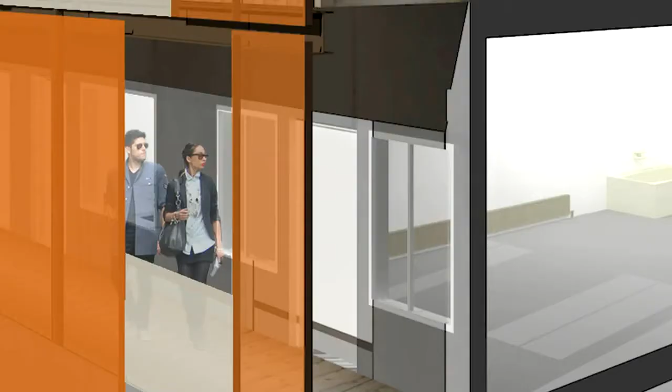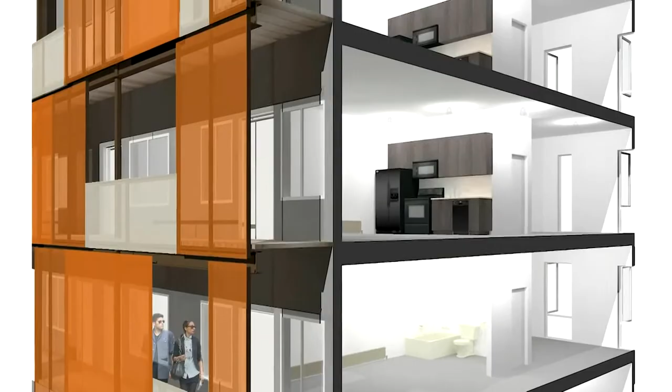I saw the opportunity when the economy slowed down that we could change directions. We could take a new course. We could really focus with the more limited resources on what people really needed, what was going to benefit the greatest amount of people. And what popped up was the Path to Net Zero program. And I thought, oh, this is perfect. This is exactly what we want to do.

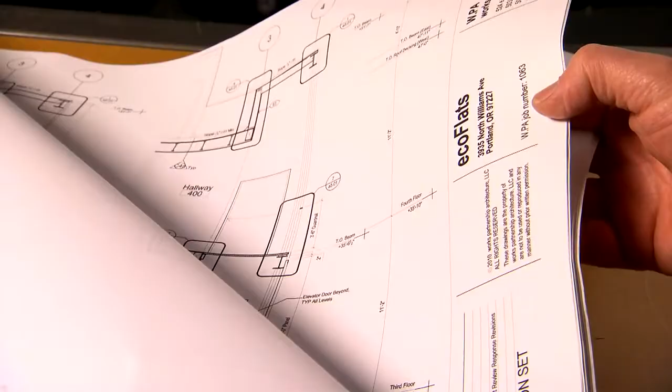This makes sense. We designed a building that had specific costs in mind for what people could afford in a neighborhood. When you approach a project like this, you need expertise on board to see how what things are going to apply and what are going to be the biggest bang for your buck. But where are you going to go to be able to integrate HVAC with solar thermal, interacting even with plumbing and all kinds of different specialists? You have to be able to go to one central place where that can be understood. And so that's the Energy Trust of Oregon.

One of the great design features of this building are the exterior walkways, which help to save a lot of energy. What we've been able to accomplish here is that there's no heating or cooling or conditioning provided to these exterior spaces whatsoever, and the lighting is only being used in the evenings. Making the decision to incorporate exterior corridors instead of interior walkways really eliminates the need to heat and cool those spaces and results in annual energy savings of around 10% per year.

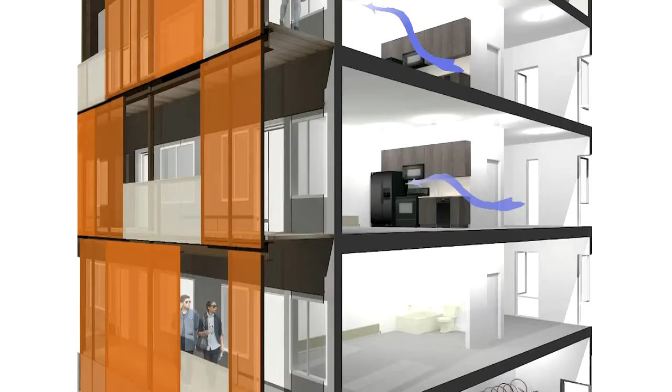The apartments are able to be pushed all the way to one side of the building, allowing for cross ventilation, natural ventilation, to cool the units in the summertime. In the day when you're gone on a hot day, you close your shutters from the inside, and in the evening you come home, you open your windows, turn on your fans and open your shutters, and you can relieve any hot air that might have built up during the day. And that, for this temperate climate, is all you need for comfortable living.

The siding itself is a ceramic coated material that has a 7/8 inch air gap behind it. So on the hot days of the summer, this being the west facing part of the building, the heat is prevented from penetrating the building by hitting that ceramic layer and ventilating out behind before it penetrates into the building.

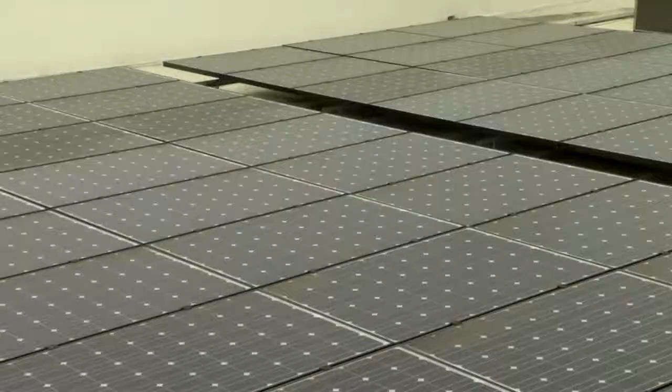Solar PV is the first thing that you want to be able to bring to a project. So what we had to do was design a building that could be affordable and meet the rents of the neighborhood, and add essentially a $125,000 solar array.

The solar PV system generates about 18,000 kilowatt hours annually, resulting in energy savings of about 20% off the utility bills. We were able to accomplish this with energy incentives and the elimination of AC units and their future maintenance costs. That's basically how we were able to add it.

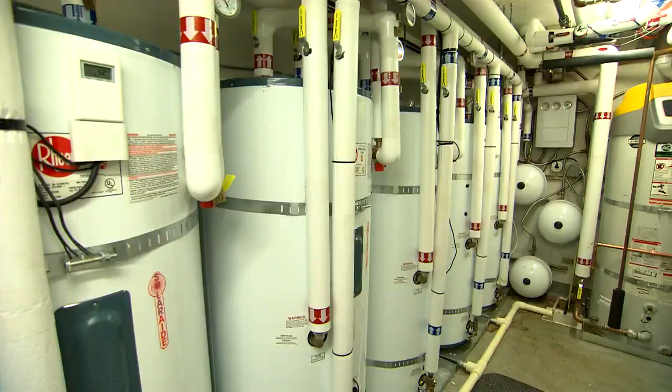These hot water tanks are banking 600 gallons of hot water from our solar thermal system. On a normal sunny day, the system can generate 2 gallons per minute at 185 degrees. On a long day, we generate a tremendous amount of energy.

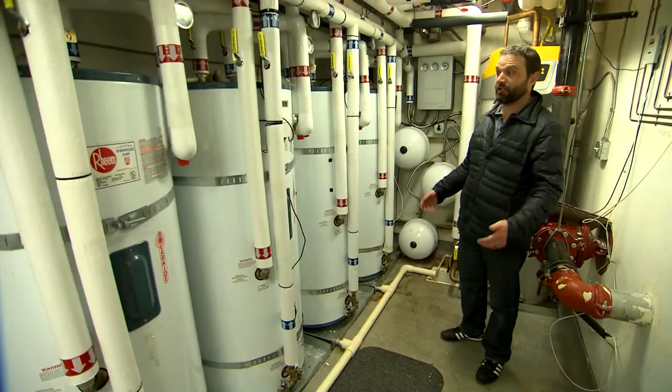Because domestic hot water is one of the biggest energy users in multifamily buildings, it made a lot of sense to put a solar thermal collector in this building. In this building, it saves about 700 therms per year, which translates to about $1,000 off the utility bills.

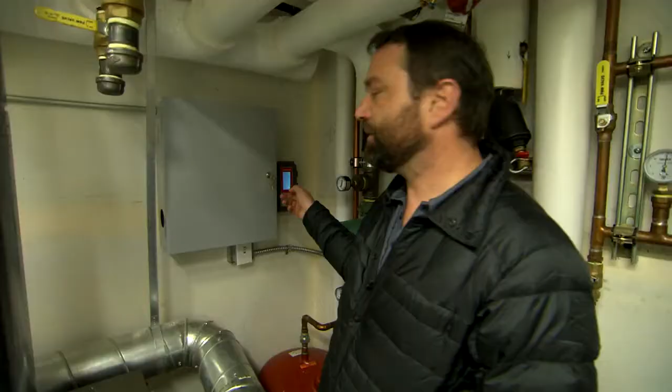This Honeywell sensor is testing the outside air temperature and sending a message to the boiler to tell it what it should be doing. It's a heat-only system on this building, and it's extremely efficient, also heating the retail core, including a restaurant and its makeup air.

For us, it was a natural fit to locate in ecoFLATS here as a net energy zero project. It was important to me that we capture or benefit from some of the energy efficient systems put into place, such as the hydronic heating. We captured that in our loop here, and the envelope, naturally, we benefit from.

In working with the project teams, one of Energy Trust's biggest priorities is to work closely with the teams to ensure we're maximizing energy savings as well as getting the right systems incorporated into these projects. Their engineers were working on this project as much as we were, not only to verify the studies, but also to enlighten us to things we might not have thought about.

ecoFLATS is designed to be a highly reproducible model. We feel we can build it anywhere along the West Coast and we'll be able to achieve the same results.

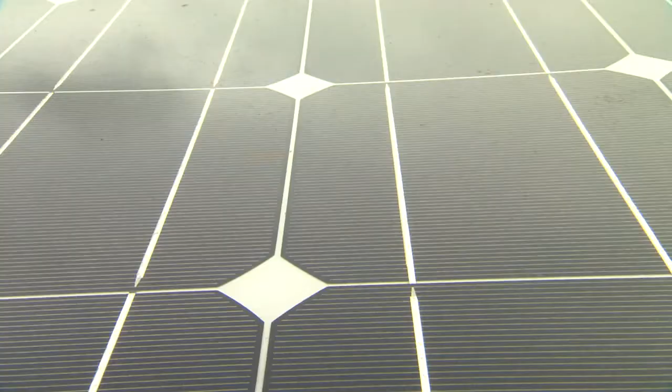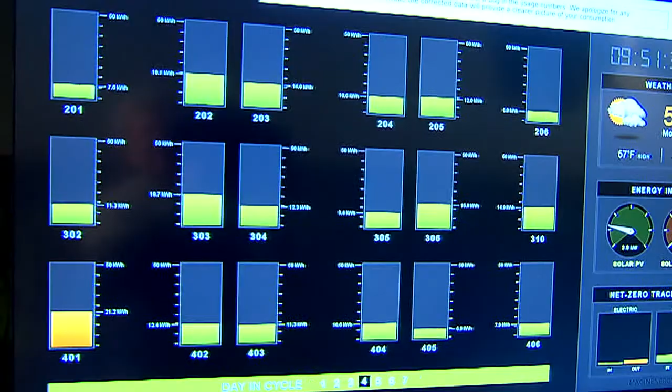No matter what you provide, in the end, the person flipping the switch is going to be a big part of that decision. There's a solar panel on the rooftop, and are people going to feel less conscious of how much energy they consume because so much is being generated on site? That's where we decided to develop an energy monitoring system available for everybody in the building to see all the energy consumption and positively influence one another.

When we come home from work, we'll see what appliances bump up our energy use. You'll be like, oh, we cooked a lot in the last 2 days, or we ran the washing machine, and you'll see a spike in your energy use.

Supplying them information, we feel, is the only thing we have to do to really make the difference. I think just being aware of energy use makes you think about whether we're using it in excess. You're influencing people to make the right kind of decision. It just puts it on your radar, so you think about it.

The developer didn't just create a place that was extremely energy efficient, but also a place where the tenants would be engaged in making smart energy choices. The ecoFLATS building came in about 55% more efficient than a typical code-compliant multifamily building built in Oregon, which puts it well on its way on the path to net zero.

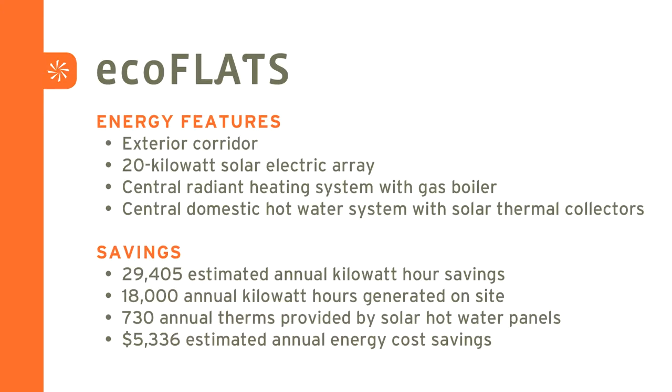It's a community center, but it's also our Delta House where we have our meetings and activities. They wanted a place to run their programs. We have the community garden space, workshops on health, working with youth, giving scholarships, youth organizations that do mentoring, and we have a senior citizen component.

They had a space that was quite a mess. They had tile on the floor, expanded metal mesh on the windows, chain link fence around the outside. So they wanted a place to meet and be able to run their programs.

The mission of this building, being a living building challenge, is basically to emphasize sustainability on a grassroots level. But then they also wanted to do something more than that. They wanted to say, hey, we want to be part of the green movement. We want to do this.

We don't know everything that's necessary. All we know is that we want to do it. It was an evolution from green to greener to the greenest.

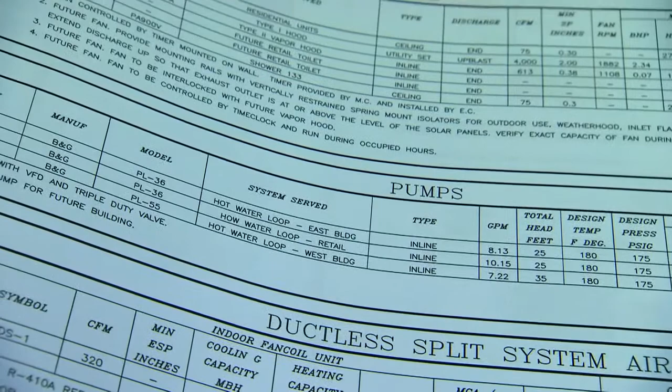One of the first activities that Energy Trust participated in with this project was the charrette. It was a brainstorming session, essentially, that spelled out the parameters of this path to net zero, and what net zero starts to look like. It put everyone in the room that was going to build this building together.

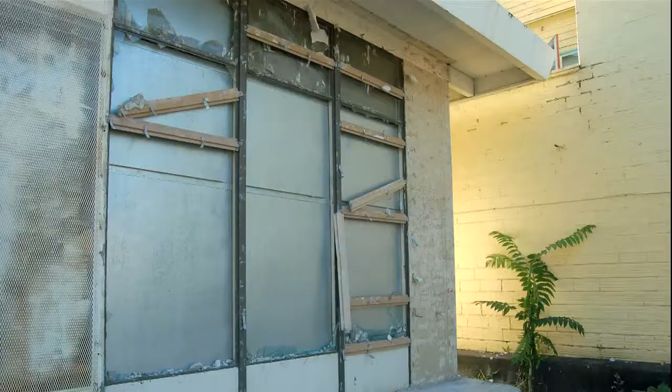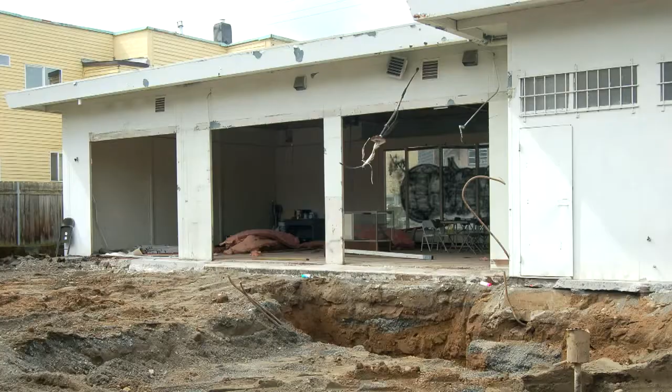That process told us that if we are going to do net zero, we would need to use a ground source heat pump and mini split systems. Our envelope was only going to operate so well considering the number of air changes. We couldn't change much of the exterior because we wanted to keep the existing building, trying to maintain a low carbon footprint. That's part of the benefit of keeping the existing building.

We've got glass on either side of this room, huge panels, and as a result the lights are typically off here during the day. They had to develop this whole design so it would fit economically, price-wise, and also energy-wise.

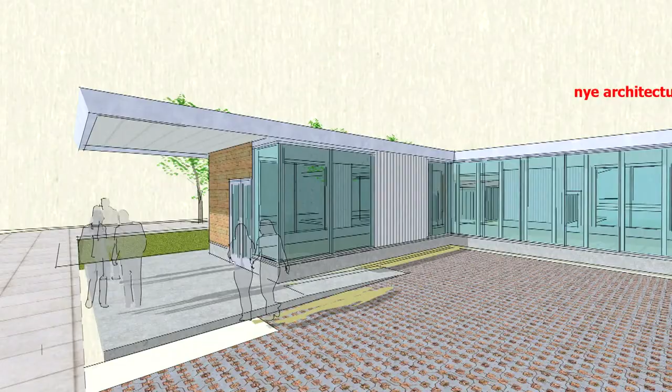The Energy Trust engineers were extremely helpful in making sure that what we were doing wasn't just something that we thought was a good idea, but something that was actually a good idea.

The building incorporated several design features that got it to its energy efficiency goal of about 60% better than a code-compliant building. The biggest contributor to energy savings in the project was the heating and cooling system, which mainly consists of a geothermal heat pump.

What we're doing is switching heat from the ground to the building in the wintertime, and from the building to the ground in the summertime. The idea is that we're treating the earth essentially as a giant battery, so that over time we'll be taking out and putting back heat as we need it.

We have created a space where people can see sustainability up front, touch it, see the ramifications of what it can do. The project team was really motivated by a sense of responsibility to the community.

It's in the sorority's mission, and it's also at the heart of this project. People are really taking this building as a demonstration of what they can do within their own community on an affordable level. There's one person at a time to start changing your habits, and it's a process.

How do you bring this high performing sustainable building into the neighborhoods in a way that addresses each street corner? It got people to thinking of energy as a commodity that can be translated into a building that will work.

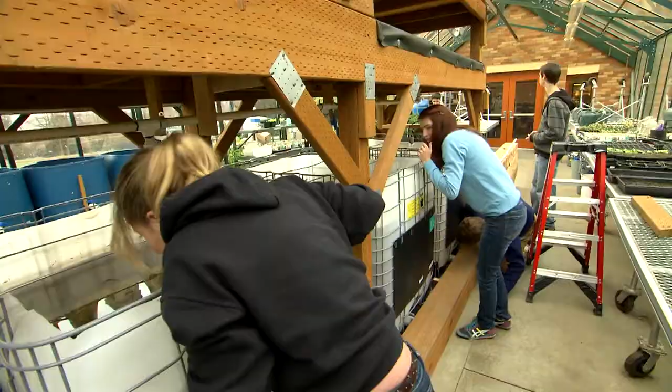We can quantify the financial benefits of having a structure like this. But we also have these intangible benefits, this excitement and this ability to have kids think about things that they might not know exists. What it's really doing is teaching the kids that come through this building every year to understand that they actually use energy.

It's really interesting to see how the whole building works and how different things can be used to make a different type of building and just to make it less wasteful.

That's probably the biggest intangible piece, that we got kids that are really asking really brilliant questions to be able to understand the system better so that they can share more about it when people come to see what's going on. We have a clean out valve, we have an inline valve to here, and it goes up to our diffuser.

The actual interaction between the users and the building is what's going to make it net zero or not. They're looking at the numbers now, and they're the ones saying, oh, I don't know, maybe we should not run that computer this week.

We should all definitely try to install something like this in our homes, and it would be a lot better if we didn't just rely on fossil fuels to heat our homes. And that's pretty powerful stuff when you can have a group of kids sitting around the table saying, we have to lower our use in the last 2 months of school because our numbers aren't right.

Energy Trust was able to support this project with over $85,000 of incentives. This money went to help pay for the technical studies, solar panels, energy efficiency equipment, and the monitoring display. It was crucial that we were able to leverage those pieces on top of the money that we were going to spend to be able to get the energy system that we got.

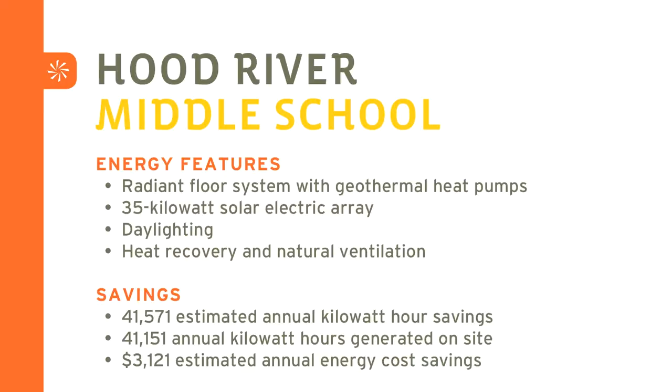The pilot projects demonstrate that net zero is within sight. Based on their success, Energy Trust will continue to offer enhanced incentives and resources to building owners who set net zero goals. If you're considering constructing a net zero energy building or simply want to learn more, contact Energy Trust of Oregon today.